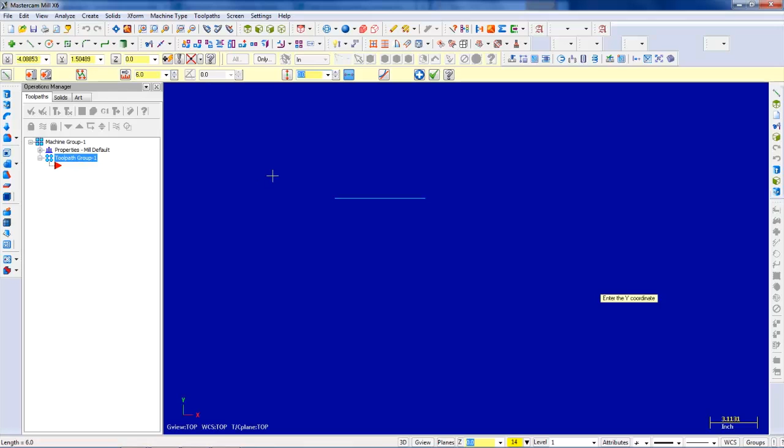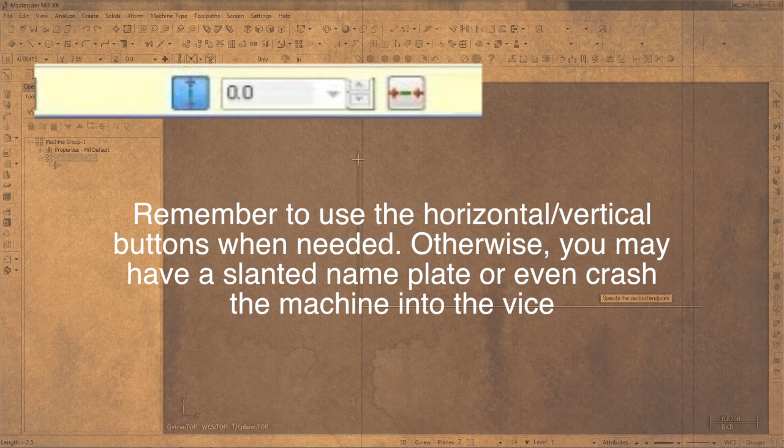Create the nameplate using lines. Let's start at 0, 0. This is the length, so let's put the length of 6, and we'll keep it horizontal. So there we go. By 2.5 inches, we'll input 2.5, enter, and we'll click the vertical tab. And then again with the, we'll unclick the vertical and put 6. We close that off and we're good to go.

I like making the image of the nameplate prior so I can get an idea of the area that I should be working in. In Mastercam you can create a bunch of different lines, line segments, arcs, circles.

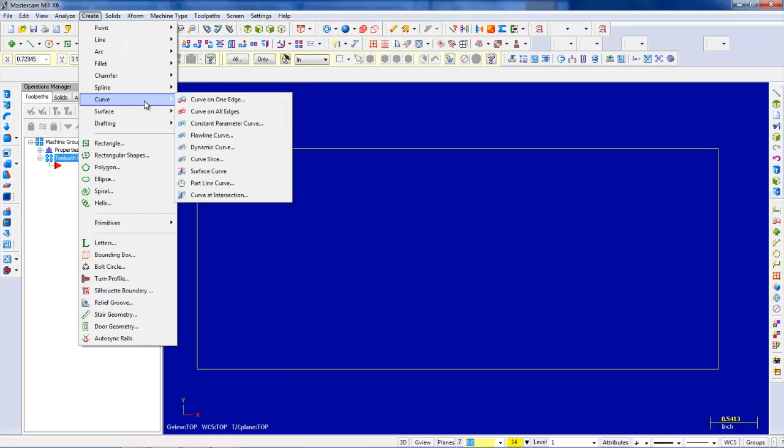What we should first work on is the outside, the contour of the nameplate. You can have a basic contour, like a basic square contour. You can make an ellipsoid contour or a circular contour or pretty much any shape that you want. For me, I'm just going to make a basic ellipse.

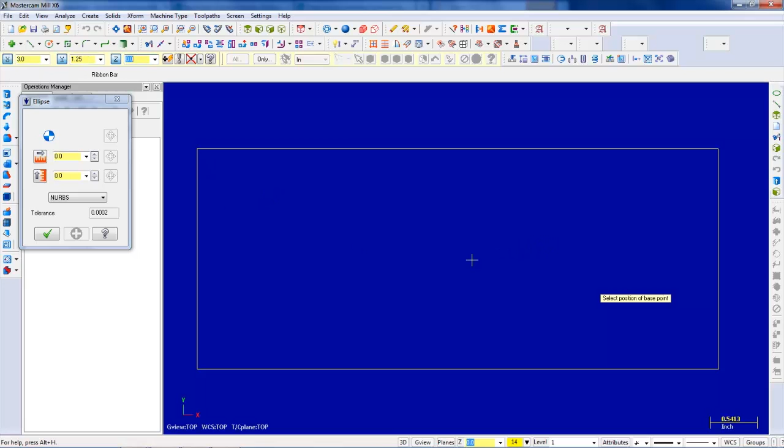So I'm going to select the base point. I want to start at the center, which is 3 inches in by 1.25, and that, as you can see, begins the circle here. And I will have this be 3 inches, and the height be 1.25. So the ellipse barely touches the sides of the nameplate.

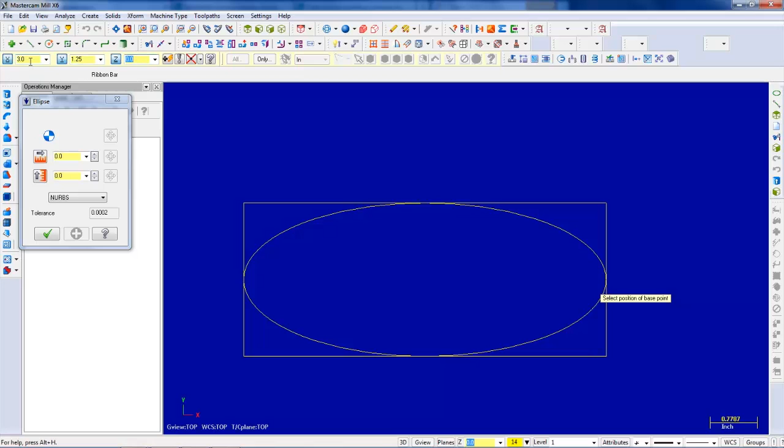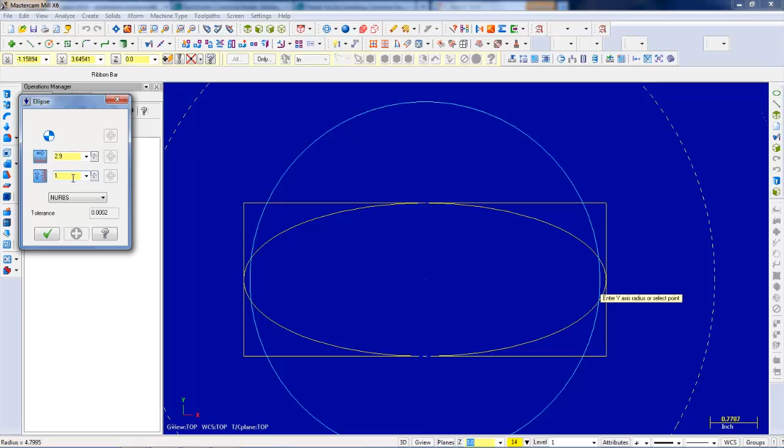I want to make an inner ellipse because I want to give the surface another contour. We're going to create another ellipse at the center. So 3, enter, 1.25, enter, and this time we are going to go to 2.9 in width and 1.15 in height. And that is all.

So I'll make a basic nameplate with the words 'My name is Earl,' and you can put it horizontally or vertically, or at the top or bottom of an arc. You could also put it at the top of a chain. A chain is pretty much a line or a closed line.

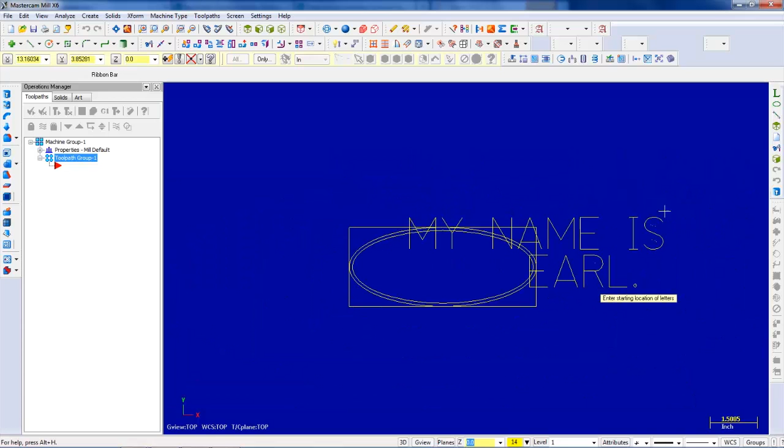What I will do is I will keep it horizontal. I will press enter here and try to put that in the center, and you can click the area that you want it in. Now this is too big, so what we could do is press escape, return, and undo, and you can change the size and the spacing of the lettering. So what I will do is I'll change the size to 0.5. The spacing changes automatically. And I can go back in, and there you go.

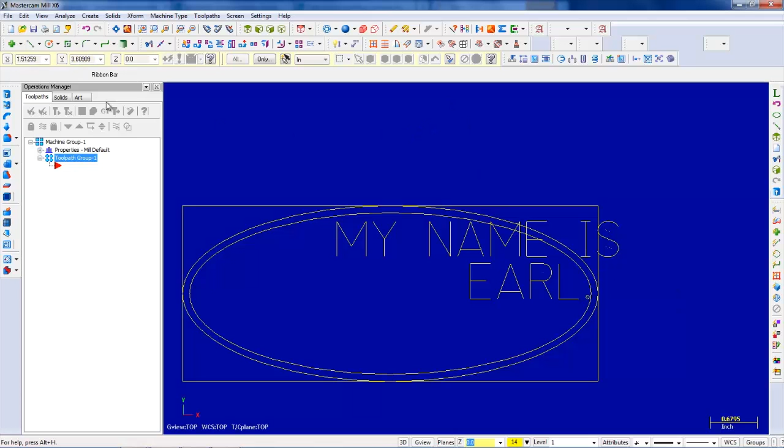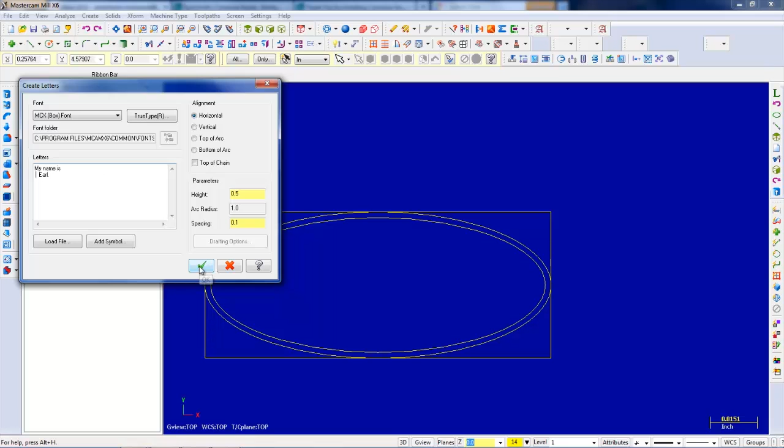Let's back out, create letters, check, and we'll adjust. Unfortunately, in Mastercam there are some things that are not as advanced, that you actually have to go back, and it's pretty much trial and error.

Now, what you can do is also create circles, lines, as I said before. You can create parallel lines. Let's say this line, and there we go. You can create curves or splines, and so on. So you can use these to create artwork if you want.

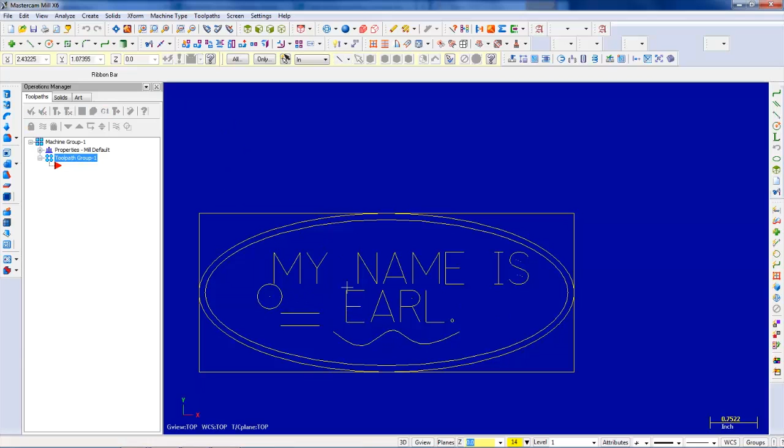So now let's say you're pretty much done with creating your basic nameplate. What we want to start doing now is creating the toolpaths. So what we start with is the contour. And we have to pick a chain. As I said, a chain is a closed line. So we'll click this chain and we'll click OK. Now there will be a set of tools that will be assigned.

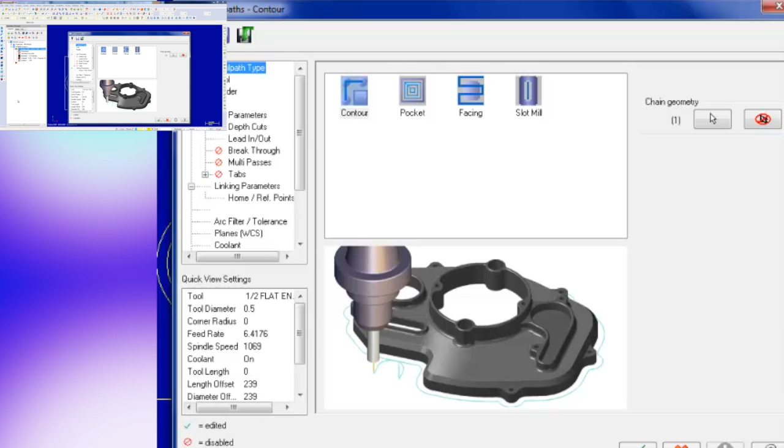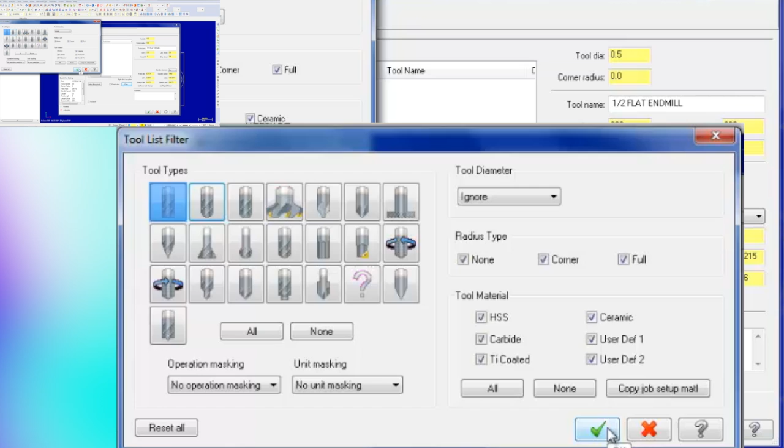It'll probably consist of an end mill, a ball end mill, an engraving tool of some sort. So this is the toolpath. When we open the toolpath, we'll click on the contour. The tool, you can select it from the library. First we'll select filter, and we'll click on the end mill and unclick the ball end mill, and click OK, and we'll select it from the tool library.

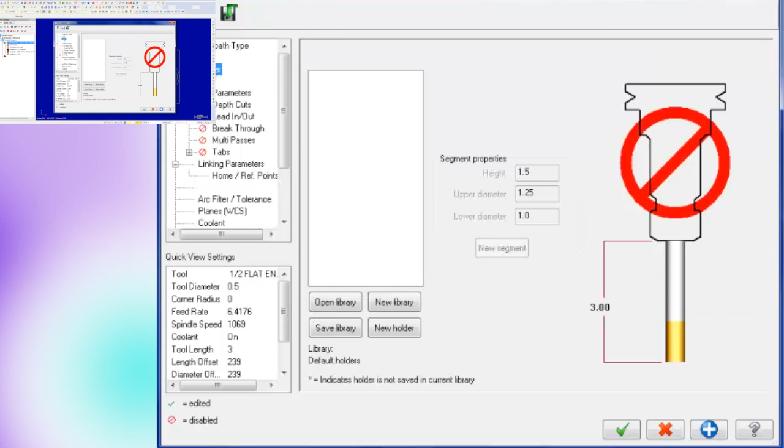And here it gives us a list of flat end mills that we can choose from. Now for this we can choose the 1/4, or actually 1/2 flat end mill. And then we will do the cut parameters.

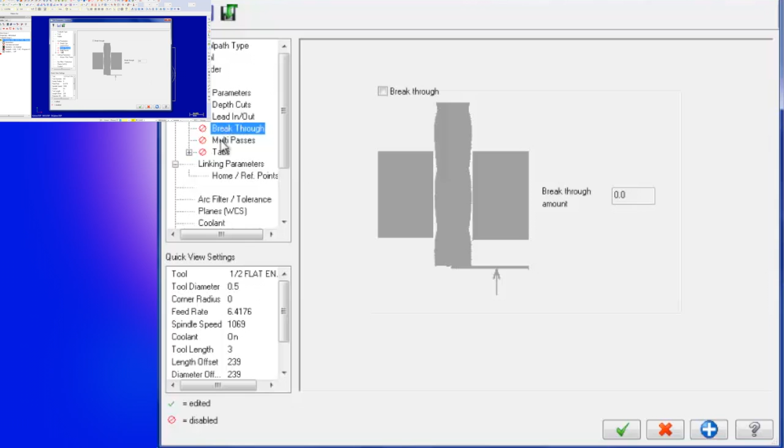So these are the cut parameters. These are pretty much options for how the tool is going to cut the piece: the compensation, the direction, the depth of the cut, lead in and lead out, how the tool itself will enter the piece, the breakthrough if you're going to drill a hole, how many passes you're going to take to get to the final cut, and the linking parameters, which are how the tool itself is going to cut into the piece, how deep it's going to go.

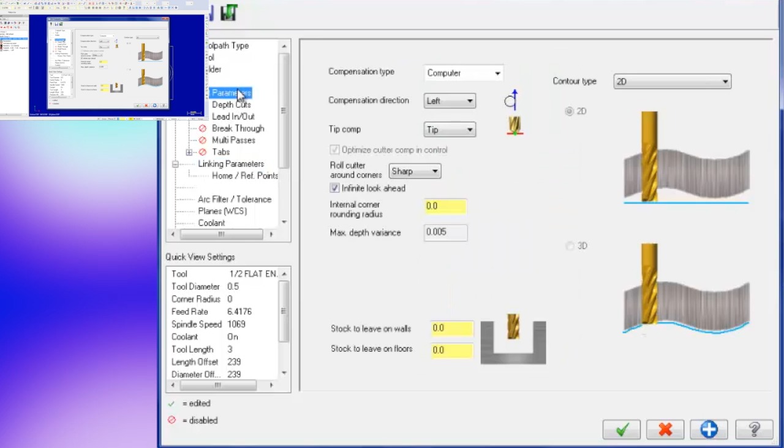So let's start with depth cut. We want to make the max rough step, which is how deep the tool is going to go with every step. We'll make that 1/10 of an inch, with a finishing step of 1/2 of that.

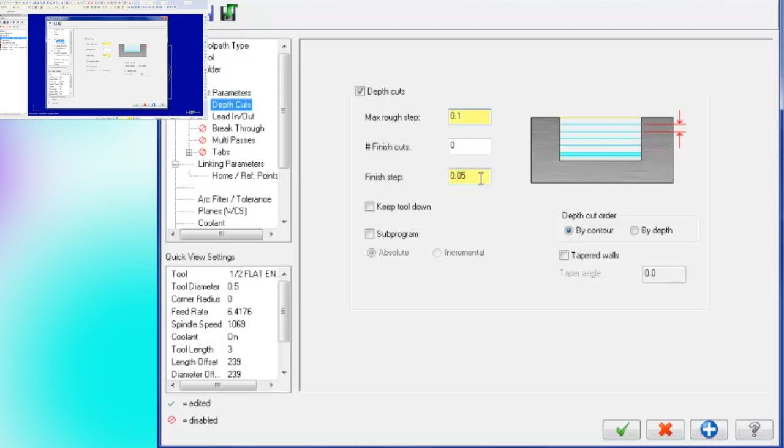This is the entry and exit. We'll see how it enters and exits the piece afterwards when we render it. We won't be breaking through. We do not need multi passes. We'll go back straight to the linking parameters.

We'll click on the clearance, and you can choose to make the tool go back up to the clearance height, which is 2 inches above the piece, only at the beginning and the end of the operation. Or if you do not click that tab, then you're going to make it go up to 2 inches whenever it's done making a cut.

So this is the retract. That's after it's done making a cut. It goes up to 0.25 of an inch above the piece. The feed plane is the feed rate. We can make that 0.2, that's fine. The top of stock is at 0, and the depth that we want to go to is, we said that the aluminum piece that you'll be working with, the raw stock material, is 0.5 inches. So we will make this 0.5, and that will be absolute.

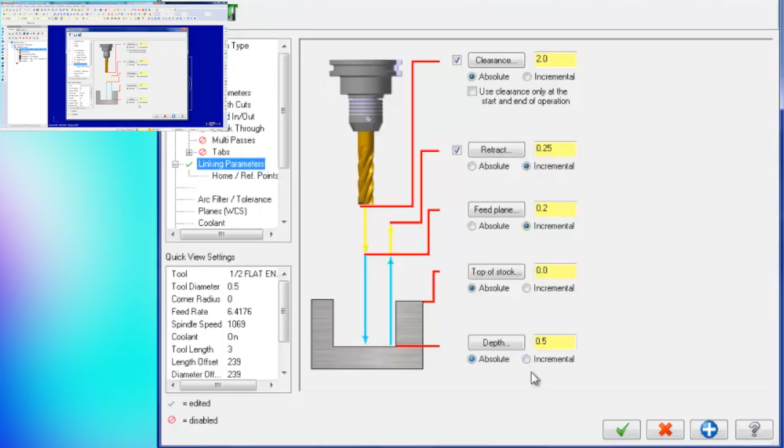Check this, and it is now inside. So this is the toolpath, as you can see. Now from the top view, the toolpath is inside the piece. That's not what we want. We want it to be from the outside. So what we will do is click on parameters, go to cut parameters, and we'll let that be right. And check. And this is the regenerate button.

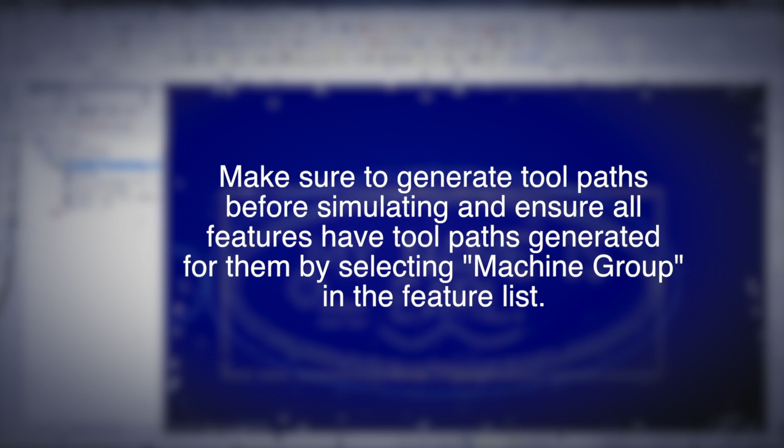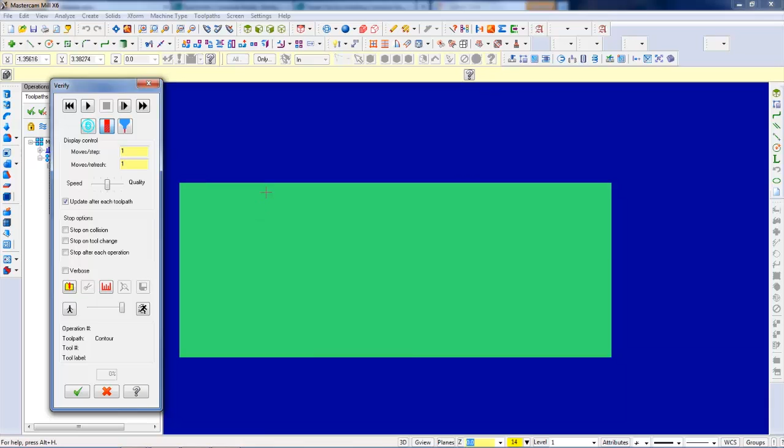And when we regenerate, that is what the toolpath will look like. So we can see the tool cutting to verify by clicking this option and press play, and it will take a few paths, and then it will start cutting into the piece. Oh, and then

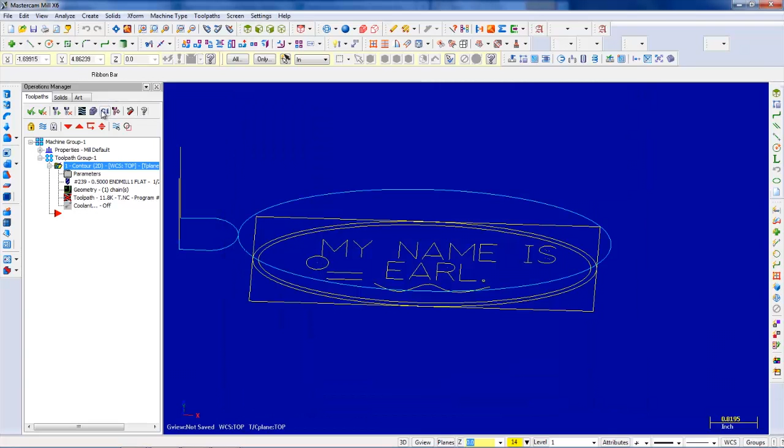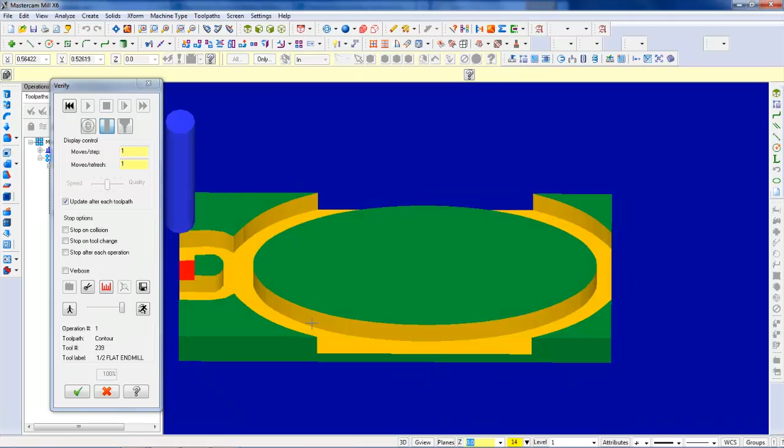So in order for it to cut into the piece, what I forgot was to put the negative sign here, because we will be cutting down into the negative z direction. So again, we will regenerate. As you can see, it'll be more than one path, and we'll re-verify, and there we are. Can fast forward. Now we did go 0.5 in the negative z direction, but we didn't set the stock, and therefore Mastercam generates stock for us, and we will set the stock later and re-verify.

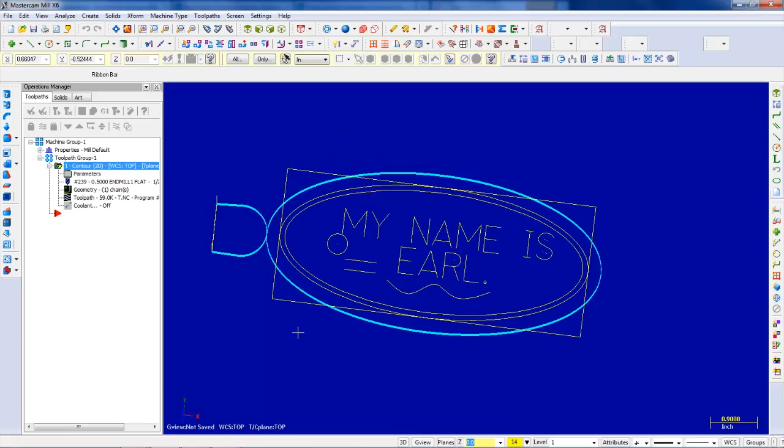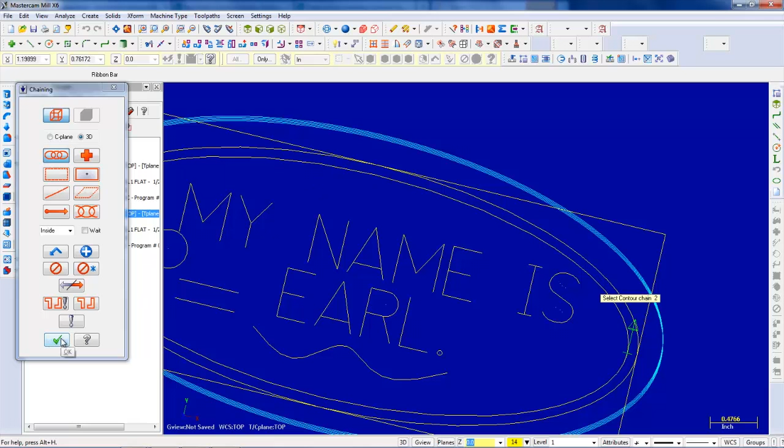Now that we're done doing the outer contour, I put an inner contour, a little chamfer, or a little fillet. And the way we do that is we create a new toolpath, contour, and we will select this chain and click OK. And the tool here will be the ball end mill. We go into the tool library, and we will use a 1/4 inch ball end mill.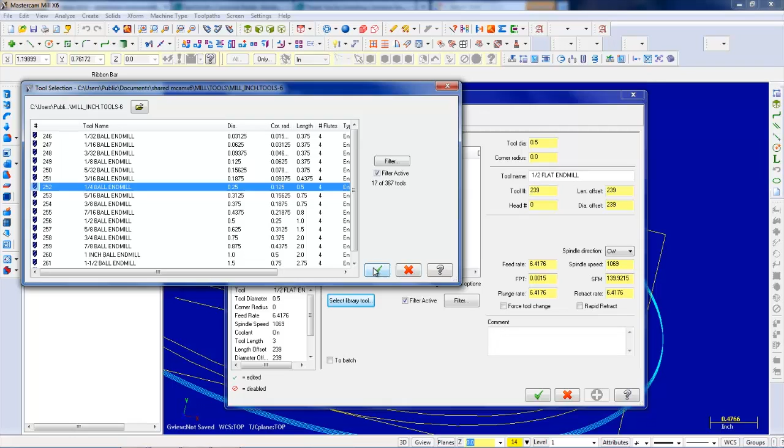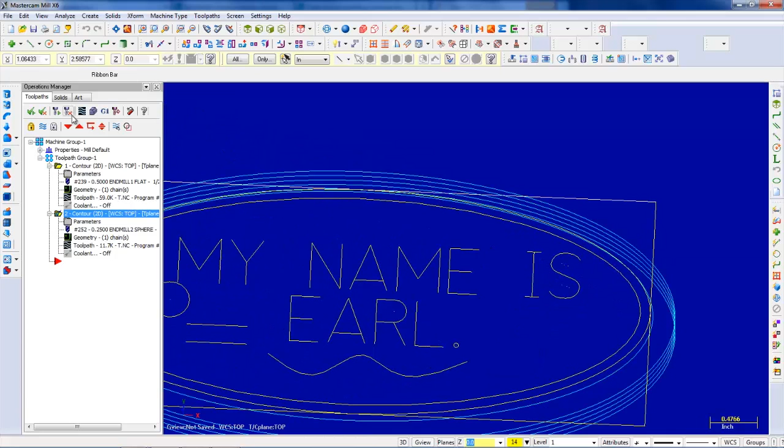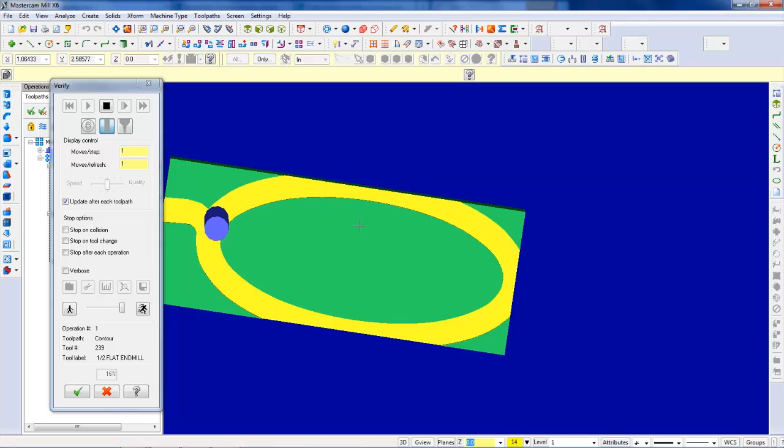So we can go straight to linking parameters, and we will select a depth of 1/10 of an inch in the negative direction, and there we go. We can verify that by going up here, regenerating, and play. Now this will give us both toolpaths. And we can fast forward. And this is what I did with the ball end mill.

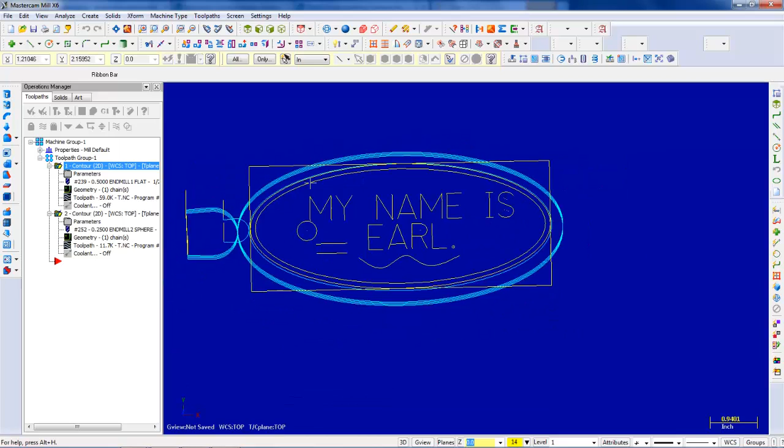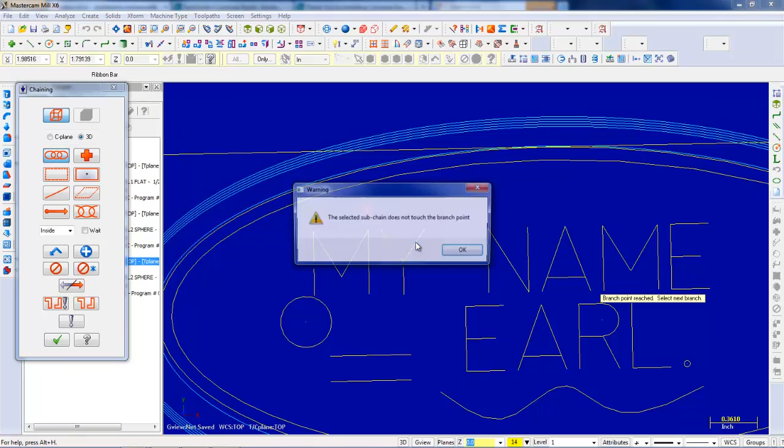So now it's time to do the engraving. There are several methods for creating the engraving. The best method, or the easiest method, is to create a basic contour again with an offset of 0. So it now is asking us to pick the chains. So we'll select all the chains. When it says that, pretty much you just have to end the contour chain that you're at and just select the next one.

And that's because it's asking for a branch point, and a branch point is basically an area where the line ends and another one begins. So here the branch point for this line was this line, so we can end that. There are no other branch points, and we end this.

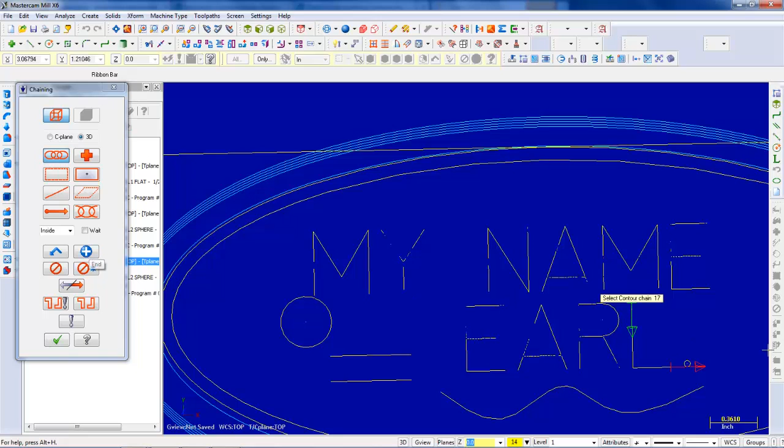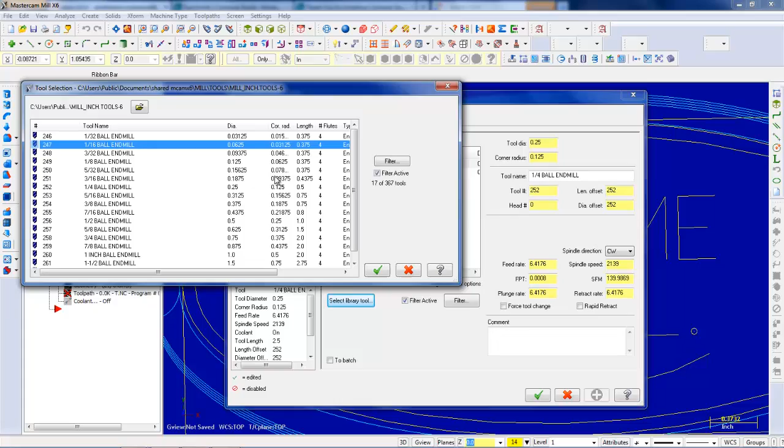Alright, now again it's a contour. We haven't decided which engraver we were going to use during the semester. So for now we're going to use a 1/16 ball end mill on that, and we're going to set the diameter offset to 0. We will turn all compensation off.

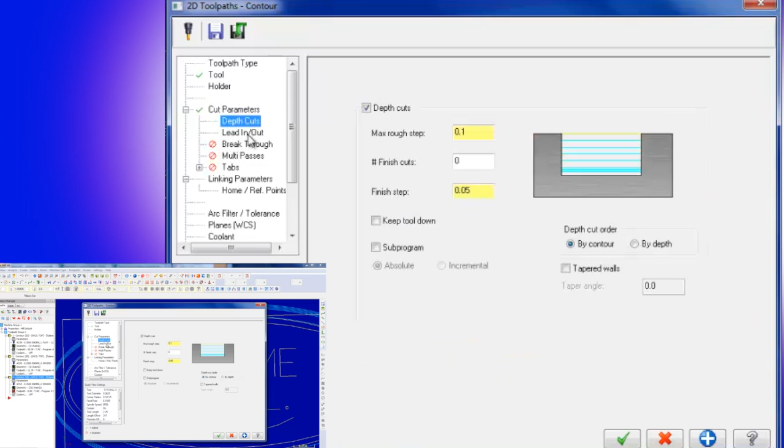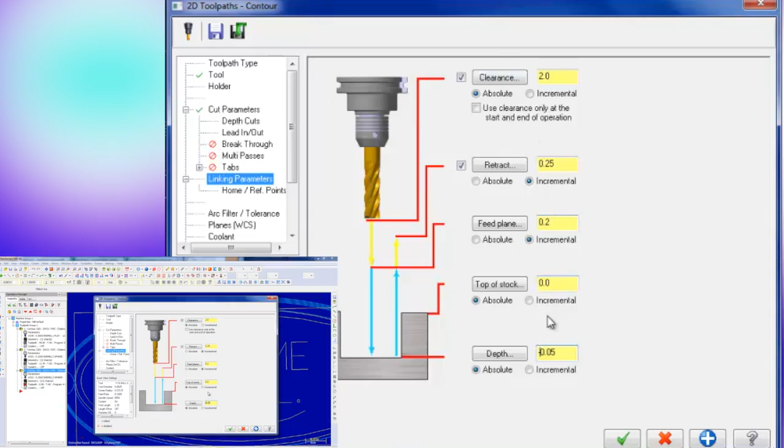And we can go straight to linking parameters, and we'll say that the depth is 1/20 of an inch, so 0.05, negative, and that is all. Now we can verify all this. Generate, and go up here. We can verify all this.

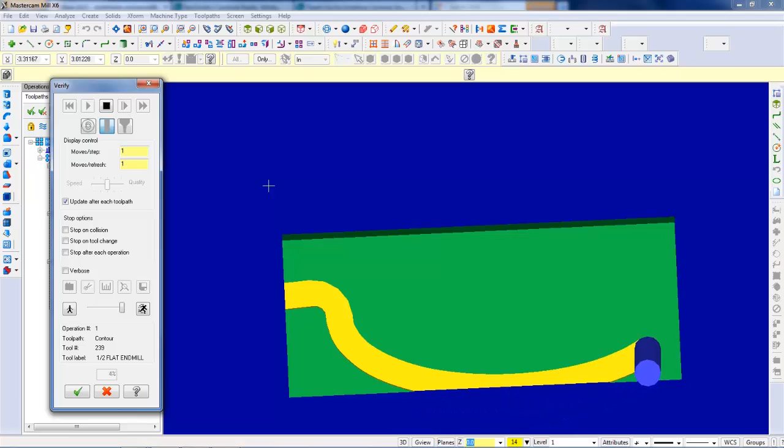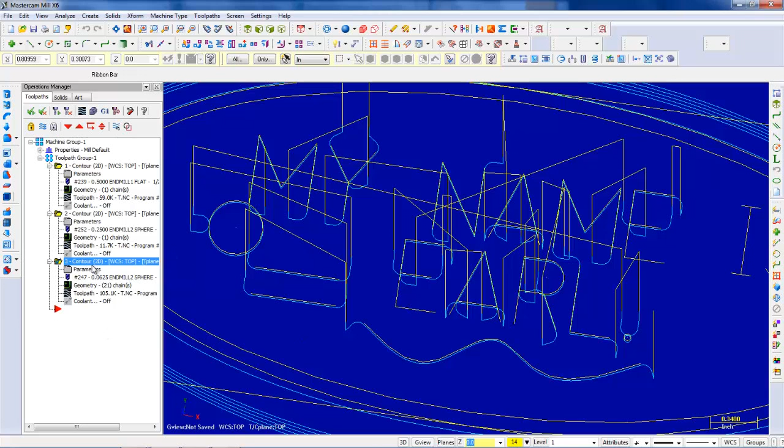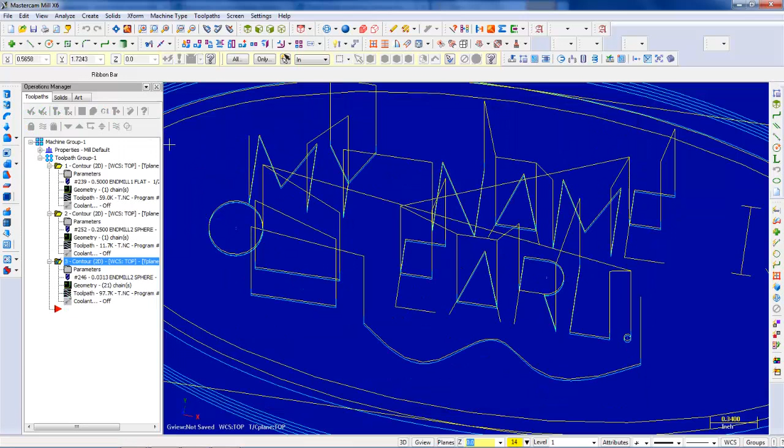We can fast forward. Once in a while you'll get funky things like this, so you'll go back and all you have to do is just change the parameters. Here we left the lead in and lead out checked. We uncheck that, and I believe the tool that we used was also too large, so we can reselect the tool from the tool library. Let's regenerate, and let's see where that gets us. Press play.

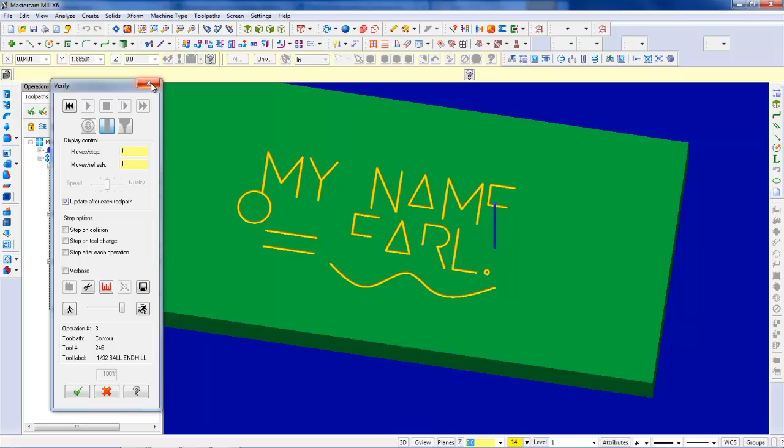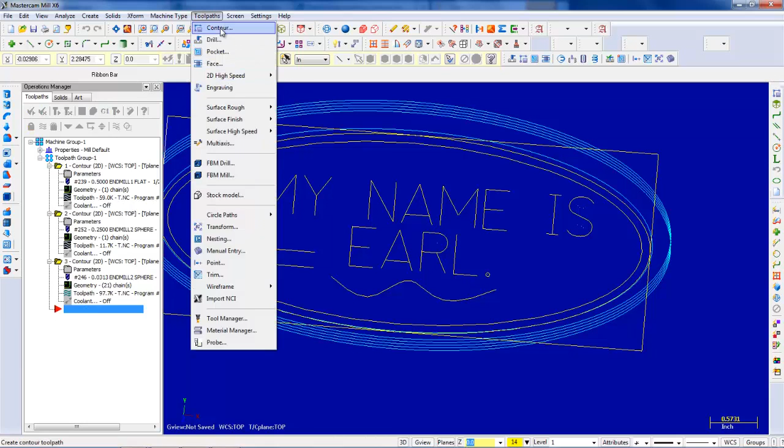So whenever we find areas such as here or here or here that are incomplete, that means that they were not selected when we were selecting the chains for the tool to follow. So all we have to do, we can actually turn off the toolpath so we can see better here, and we just reselect them, or we can create a new toolpath, contour, and I believe it was the end of the A.

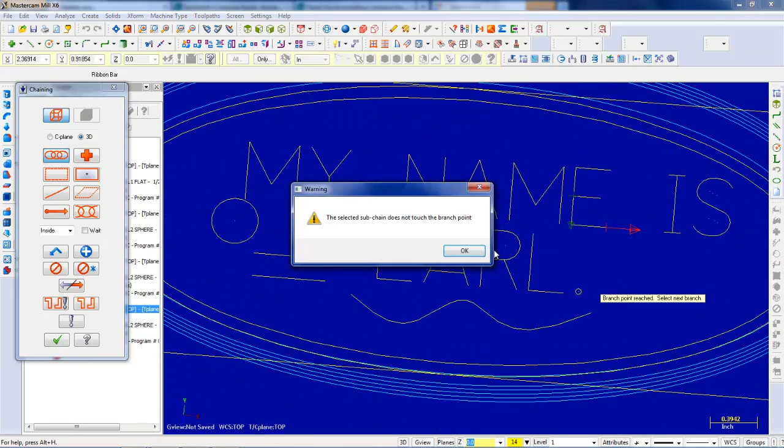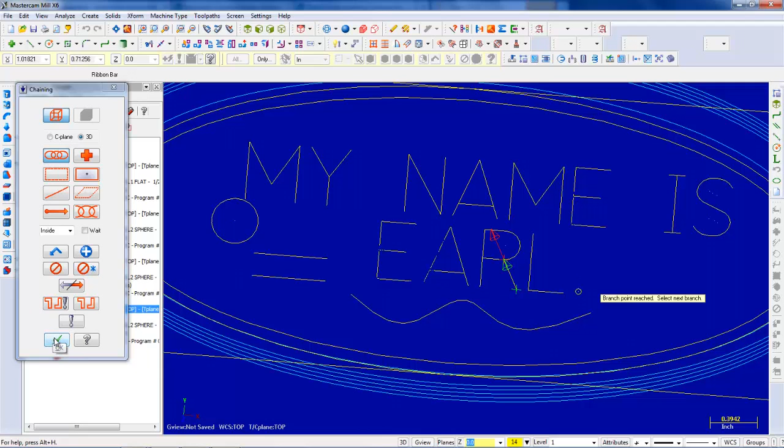And close it. Again, contour tool. The offsets are off, lead-ins and lead-outs are off. We can just reset this to 0.005 negative, and we should be good to go. Now, let's see. Oh, we should actually start from here, and we can fast forward.

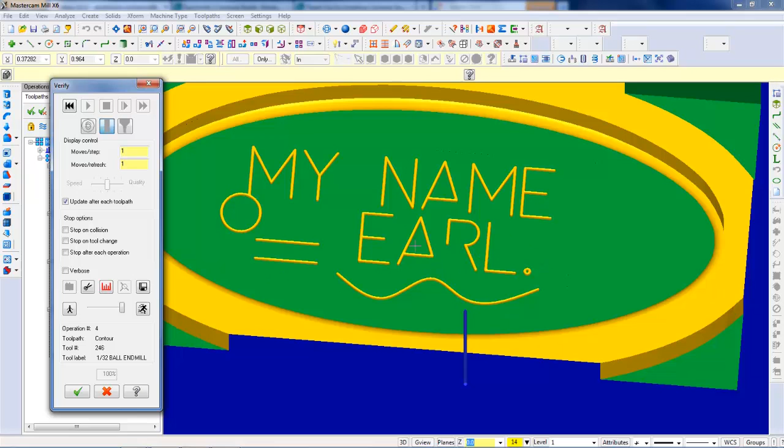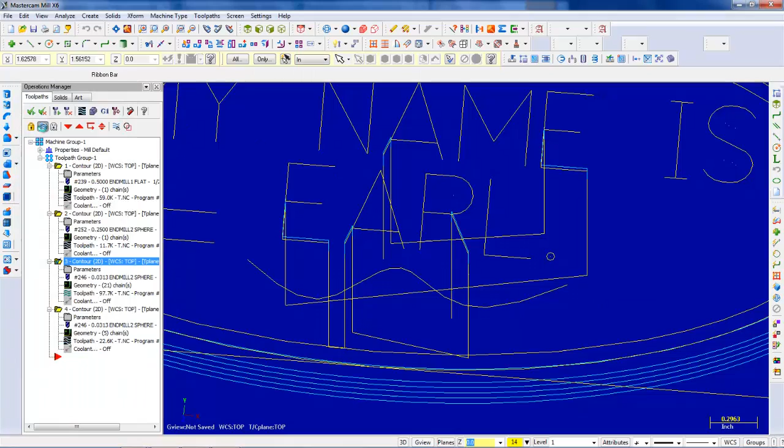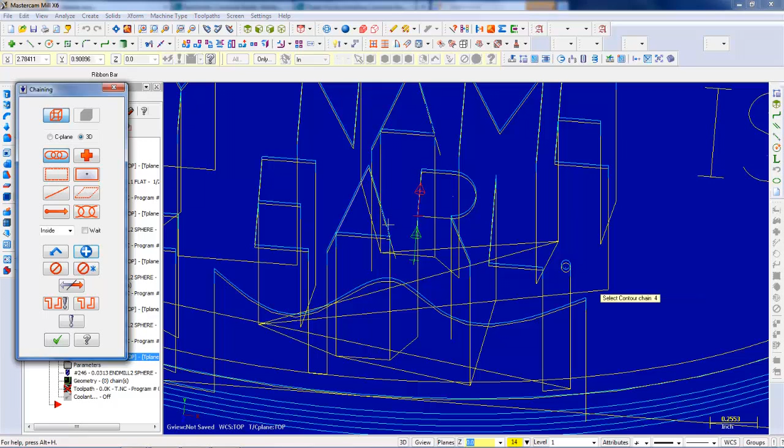Okay, so what's left is the second side of the A, the R, toolpath, contour. What we can actually also do is we can turn on this contour and see which areas have not been chosen. You can see over here hasn't been chosen, here, and the bottom of the R. So we'll do another toolpath, contour, and there's one, and here's one, and there, and here we are, and that should be it.

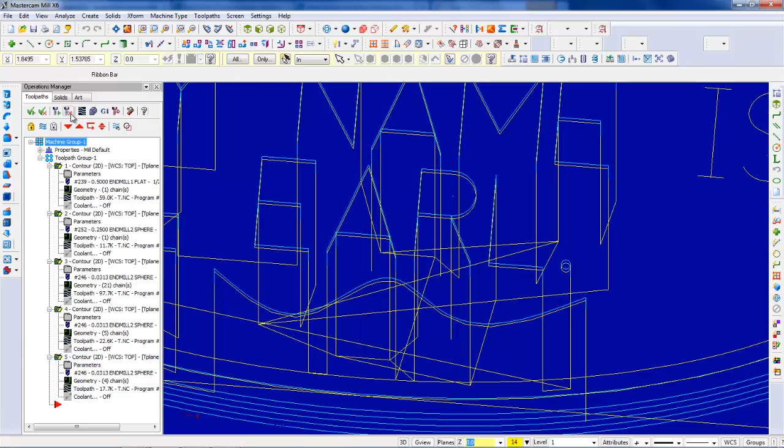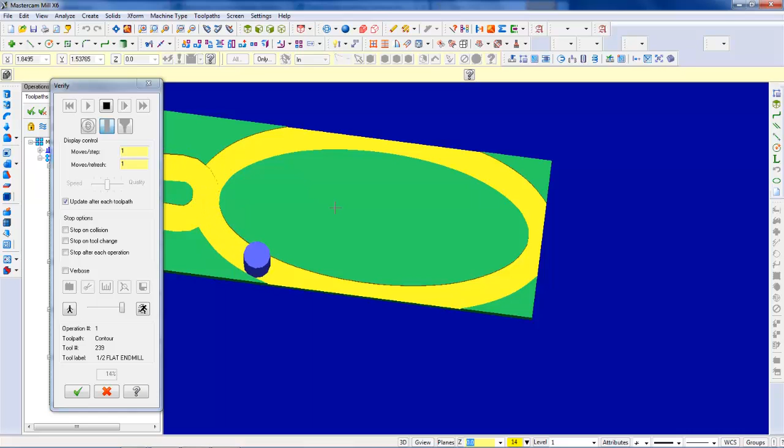And tools, compensation is off, lead in, lead out is off, and the linking parameter again has to be set. And we are good to go. So, group, generate, and we can watch it. So now it's making the contours. And there's my nameplate. Now you can do an unlimited amount of designs on the nameplate using the basic contour method.

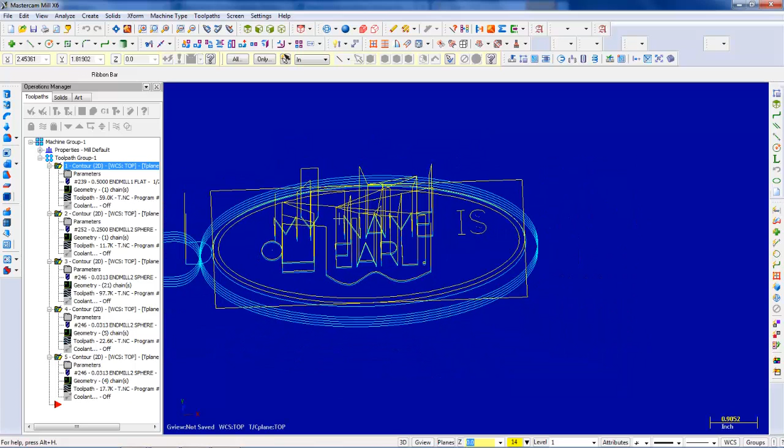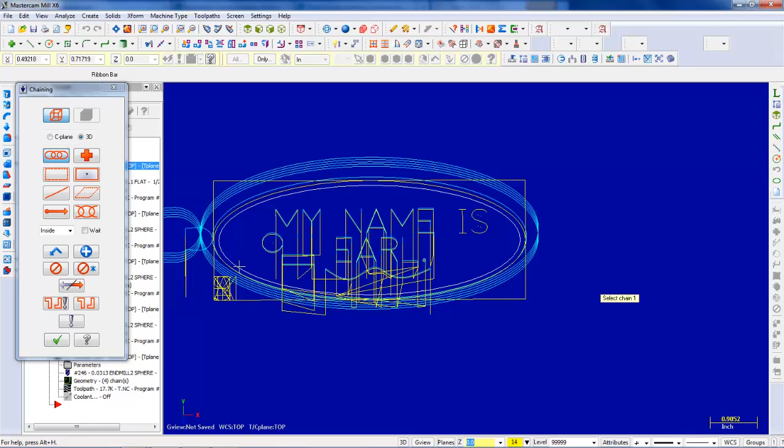You also have different fonts that you can choose from, and in here as well. So you can also put it at the top of a chain and make the wording go around or according to whichever chain that you want. So here you can go inside. We can do that again. Create letters, or let's go back. Escape.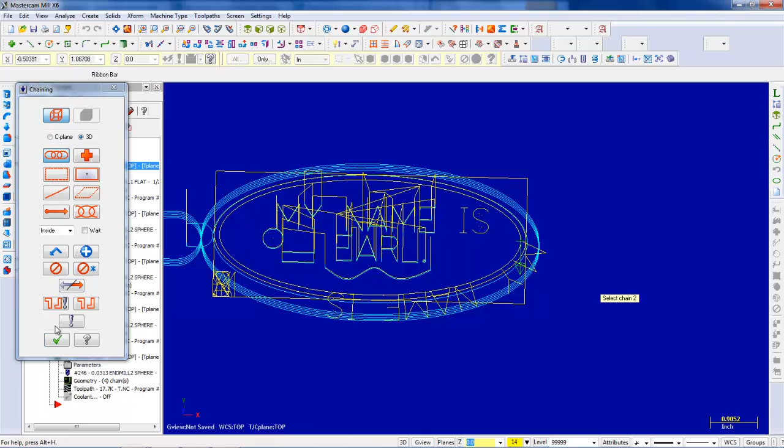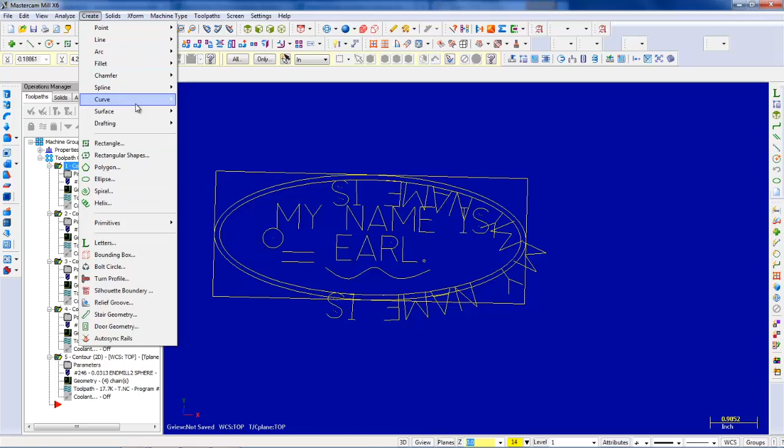Create letters and pick a contour, and we will pick the opposite direction. This is for changing the direction, and it will be on the inside, as you can see. Let me turn these off. So that was my last one. And you can create a myriad of shapes and designs using the options that you have here. And that is pretty much it. It's very basic, very simple. There's only 2 steps left, and these are to set up the stock.

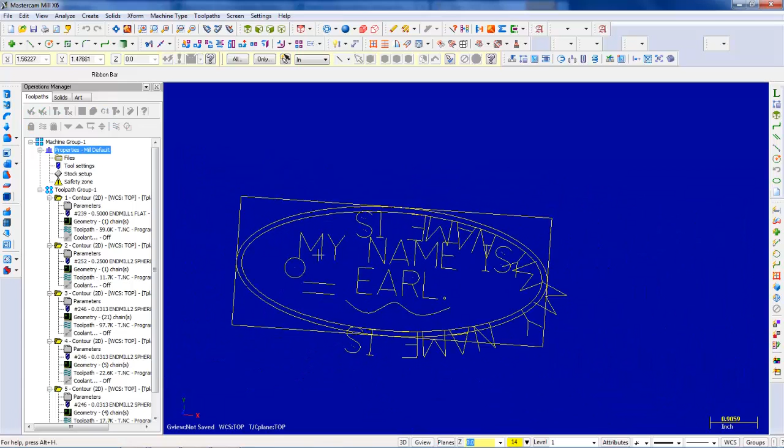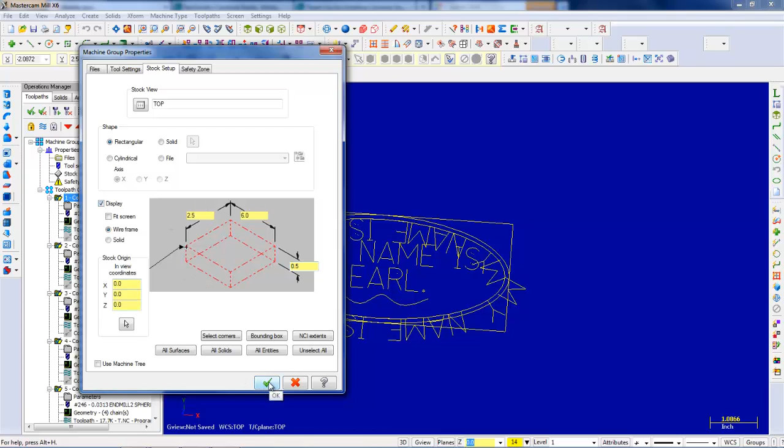Pretty much just, and here is the box where you can set it up. What you do is you just set the dimensions, which as we said are 2.5 by 6 by 0.5, and here you can choose where the stock is held from. So we will hold it from this top portion here, and that will be our zeros, and we will display it. So here we are. That is stock displayed. And we can re-verify, and we will choose to go quickly, and there it is.

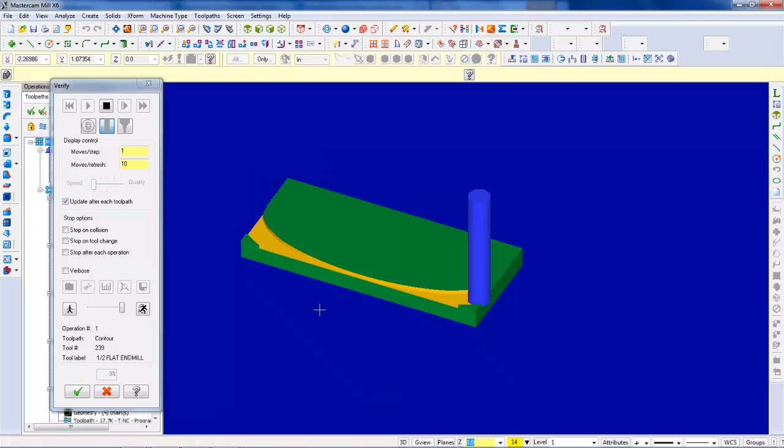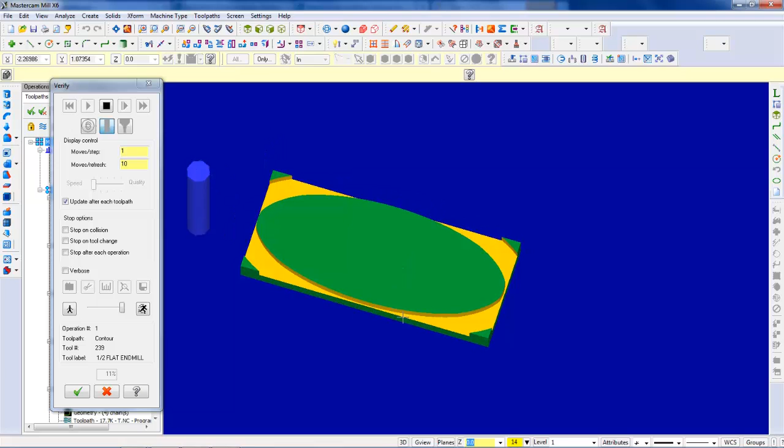Now what you can do is you can make your ellipse a little bit smaller than the box itself, so that you can make sure that the tool passes over the entire area, so you do not have a flat surface anywhere. And we can fast forward through this, and there we are. That is your nameplate. The final step is to post-process, and that is pretty much creating the code that we will use on the machines. I will do a quick post-processing right now.

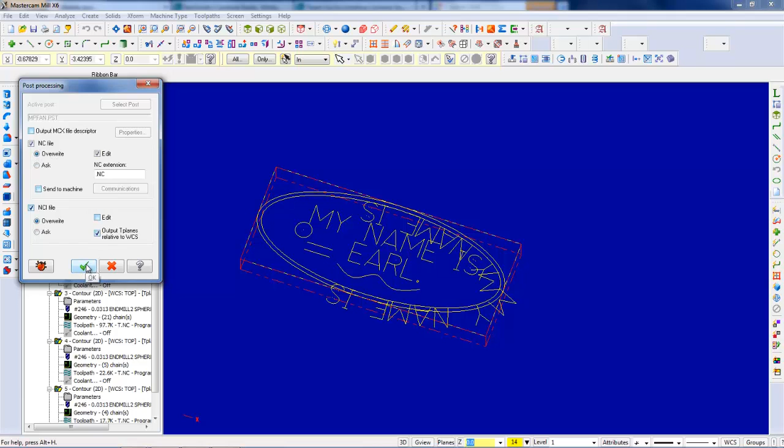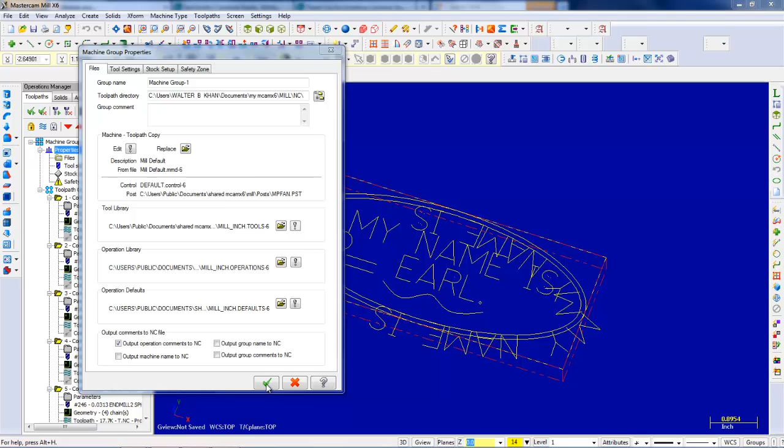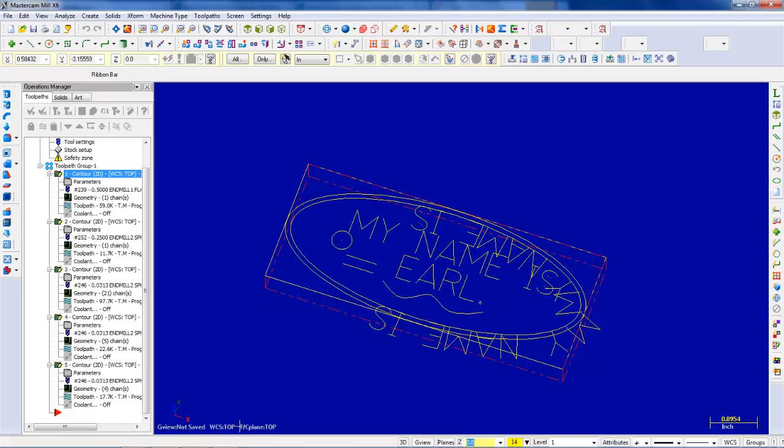And firstly, we have to set up the mill, the type of mill that we're using. So here, the mill is the default. Click on the files, and we have to replace it with the type of mill that we're using, which is the Fryer MB11 NLM 3000. And select OK, regenerate, and we will post-process. Alright, file. And here is the series of lines that will come out.

Now we will save this to your desktop as an NC file. To desktop, and you can name it. I will name it sample name plate, or we can make it small. Sample name, and save it, and we will go into our desktop. And here it is. So we can open this with a notepad.

And there you are. Now we will be assigning tool numbers and the tool types. So these tool types, we will be telling you which they are, and their size, their width, and what number to number them. And that is all. You'll put this on a floppy, or you'll give this to me on a flash drive. I'll put it on a floppy disk, and we will run it through the machines.